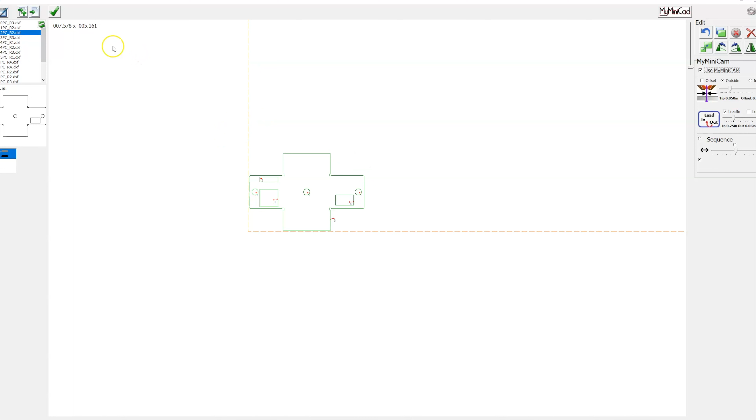Notice that I always look up here to confirm my scaling in MyMiniCad. Sometimes you do have to go into this setting here and change and modify this default. Right now our scaling is correct. If you select the figure, you'll see that it's 7.5 inches by 5, so that's correct for this part.

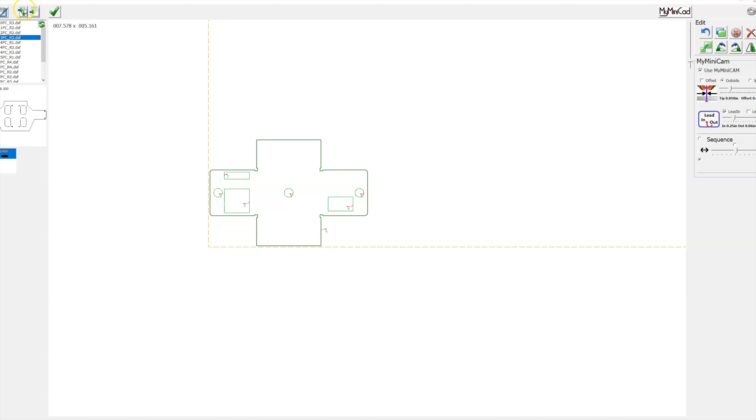To bring in a second part, which is why we're doing this video, you just select it in the menu tree here, and then click on this arrow and add. Once you do that, it'll bring that next part in.

We can click, let me see this one, I'll add that one. That's a big one. I'll add this one. I'll keep them relatively small. So now you'll notice I have 4 parts in here. You could keep adding them if you wanted to. You can click and move them by just clicking and dragging.

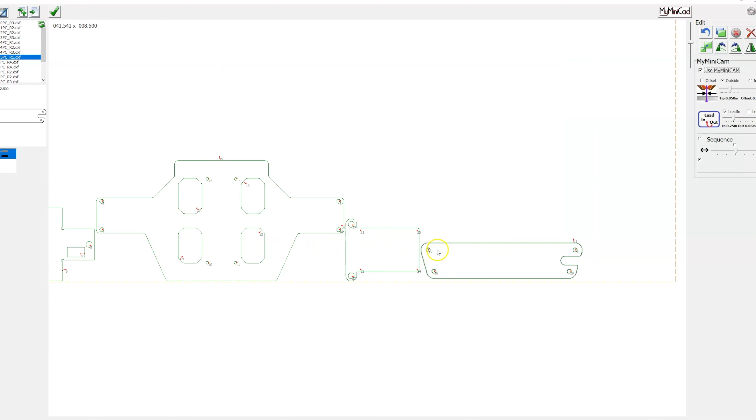When you select these parts, you'll notice that you'll have your lead-ins here, so you have your lead-in profiles. It does give you a call-out for those lead-ins. All of these are intentional - those are pierce points that we will drill those holes later.

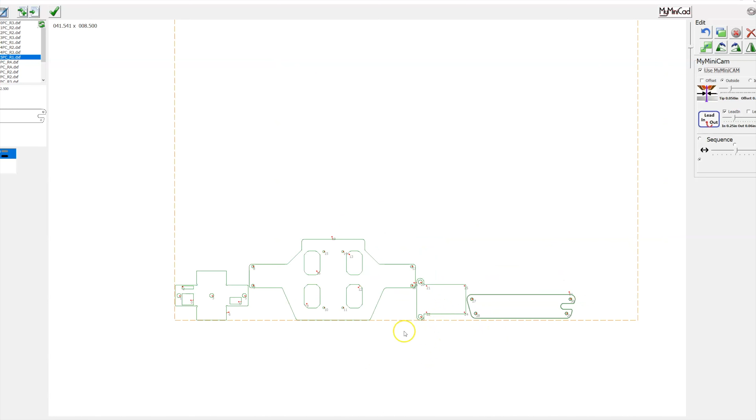Right here you have an electronics tray. This holds a torch height control module. This holds a power supply. So you have a bunch of these components here. You'll notice that we have some lead-ins - on these smaller hole profiles they are correct. They're going to pierce and cut this hole, but they're piercing it right on the profile.

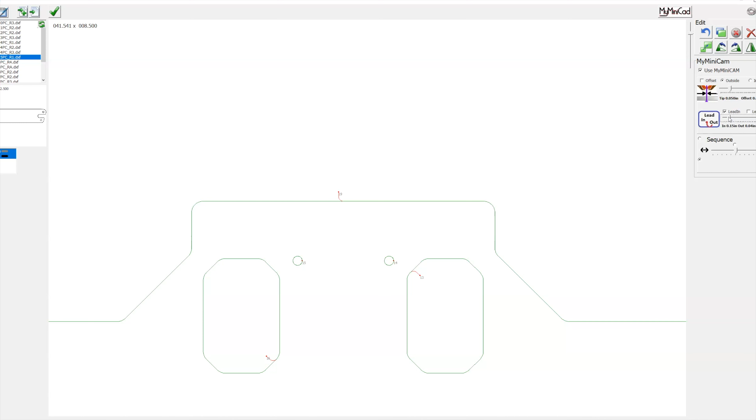If you want this hole to cut and pierce in the center of the hole and wrap into the profile, all you have to do is decrease this lead-in, lead-out parameter. So if I click this back 1, or click it back 2, you'll see that after I reduce that a little bit to about 150 thousandths, now I have a line and it wraps into my profile. So that would be where I'd want to be for parts like this - I'd want to be able to pierce close to the center of the hole and cut out to the inside, and it looks like it gave me a nice lead-in on all of these.

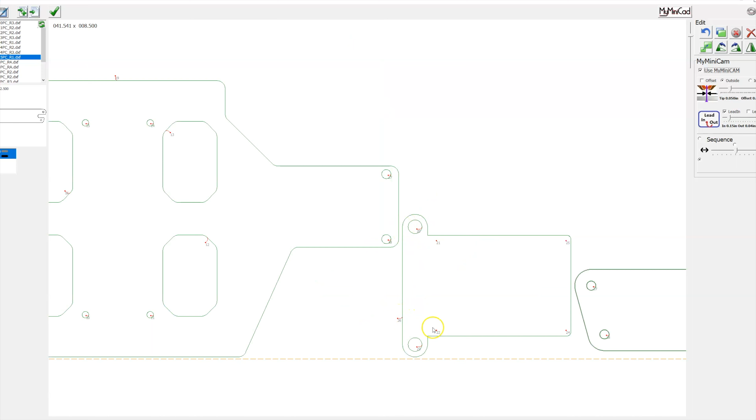You would still have to modify, say this 26. I can just click down here and right-click. It'll automatically move it anywhere on the part if I right-click. So I'll click there, and be sure if you are doing forming, make sure that you don't put these on a formed area because that will affect your backstop parameters. You don't want to hit that little lead-in spot, or have it teeter-totter if you're hitting a flat backstop finger.

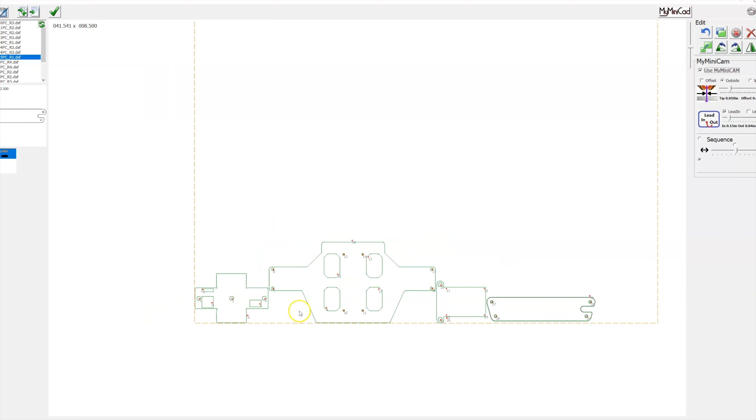So that's all I wanted to cover in this video - how to bring in multiple parts. We covered a little bit more, how to tweak those lead-ins. But check in, there's also going to be a lead-in video, so look for that one.